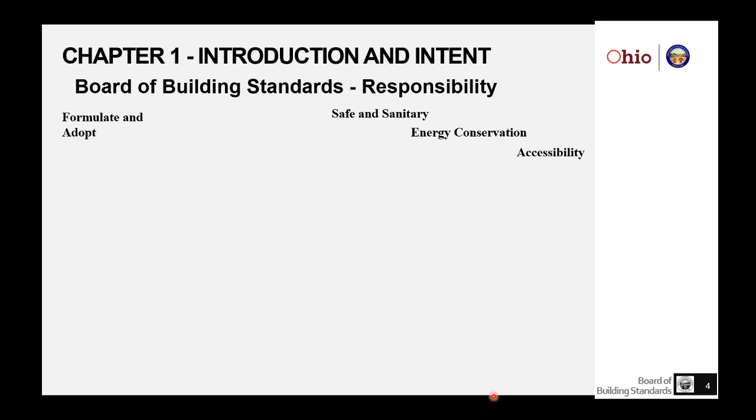So the Board of Building Standards, what is our responsibility in all this? We are to formulate and adopt building codes that provide safety and sanitation, energy conservation, accessibility. We have two families of codes that we write building codes for: the Residential Code of Ohio, which are the uniform requirements for residential buildings, and the Ohio Building Codes, which includes the building code, plumbing code, and mechanical code. These are for non-residential buildings, and these are the minimum requirements.

So that's what the board is charged with, as well as working on the process for authority to enforce certifications of building departments and personnel, and we write Chapter 1 - it's the process. As you may know, the building code is based on the International Code Council model codes, and for us, the 2017 Ohio Building Code is based on the 2015 IBC, International Building Code, less Chapter 1. So Chapter 1 is all Ohio language.

So when you look at any of the commentaries on the international website, the commentaries on Chapter 1 in the IBC are relative to the IBC - they are not pertinent to Chapter 1 of the OBC. And we have written our own commentary, which I'll be showing you in a little bit.

So to get started, we're going to do a little more introduction and talk about some keywords you should know. Chapter 1 is all about the administration of the building codes and regulation in the building process. It organizes the process, interrelates with other regulations, and establishes duties and responsibilities for everyone, providing the procedures.

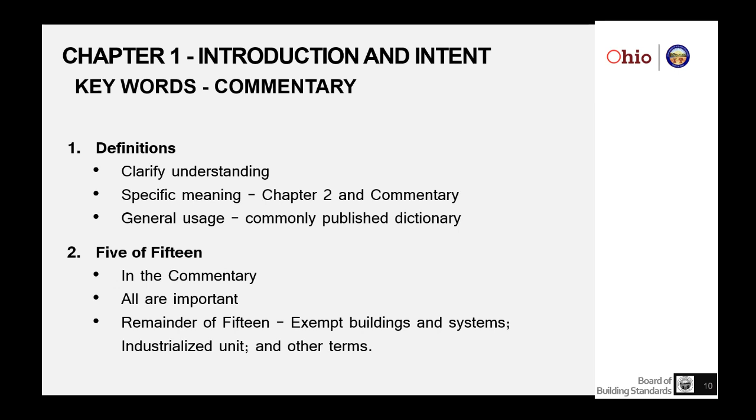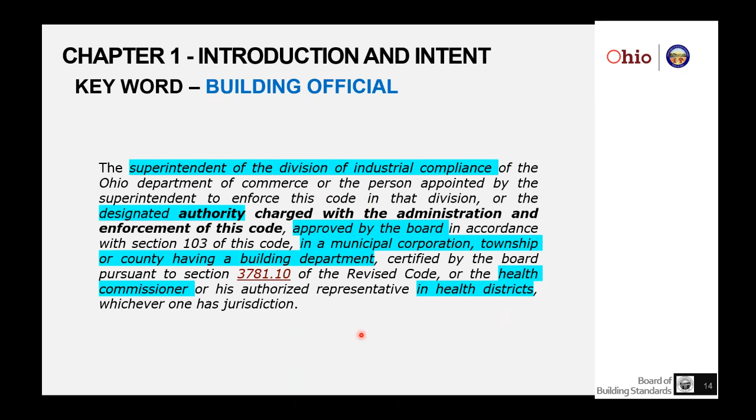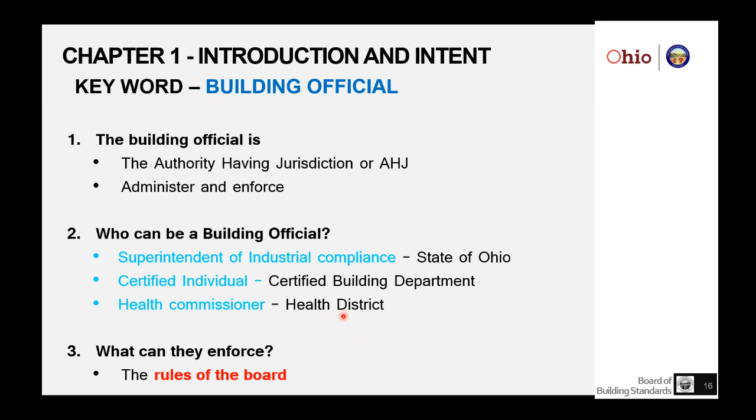So in summary, the building official is the authority having jurisdiction, and they administer and enforce the code. That's their primary duty. The 3 types of building officials that can exist are going to be a superintendent of industrial compliance, a certified individual, or the health commissioner. And what can they enforce? They can enforce the rules of the board. And that's what we're going to be addressing today.

In case you're wondering where we have the 3 different types of building officials, know that with the commercial code, the local jurisdiction is allowed to establish a certified building department. And if the local jurisdiction does establish a certified building department, one of the things they have to have is a building official to head up that certified building department. So that would be primary.

And then in the absence of a certified building department in the local jurisdiction for non-residential buildings, basically buildings regulated by the OBC, the Superintendent of Industrial Compliance for the state of Ohio is by default the building official for that jurisdiction. So no matter where in Ohio someone builds a non-residential building or a commercial building, there will be enforcement either at the local level through a certified building department or at the state level through the Bureau of Code Compliance in the Division of Industrial Compliance.

And then plumbing comes along. Some local jurisdictions enforce plumbing. If the local jurisdiction is not certified to enforce plumbing, then it falls to the health district, and it may fall to the plumbing division in the Division of Industrial Compliance if the local jurisdiction doesn't enforce health.

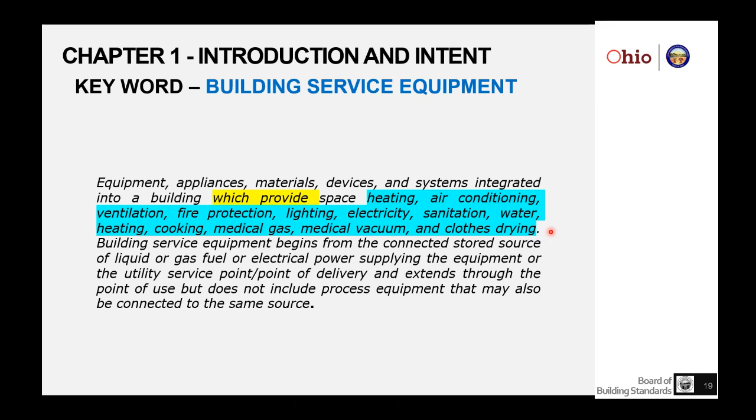And to help define this, building service equipment begins from the stored source of power and extends through the point of use. And we wanted to be really clear, because of other definitions, that it does not include process equipment. So the building code is not going to regulate the utility on the utility's side of the source, and that will be either the service point, commonly used in electrical systems, or the point of delivery, which is used in some of the fuel gas systems.

And then it extends through the point of use, wherever you consume that, and then the byproducts go off into the atmosphere—we're not controlling that end. The process equipment, we'll get into that in a bit, but basically this is something that's placed in the building and doesn't contribute to the code compliant building. It may have an effect on compliance, but it doesn't contribute to it.

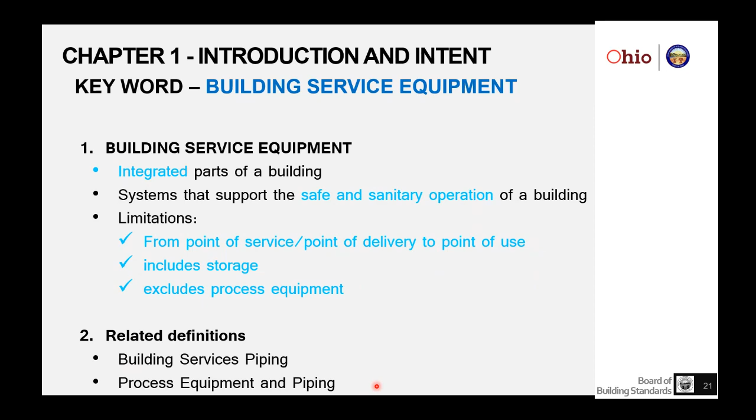So important things in summary: it is an integrated part of the building, dealing with safety and sanitary operation of the building. We talked about where it starts from, and it specifically excludes process equipment. There are related definitions in terms of building service piping and process equipment and piping in the list of definitions, which we'll touch on a little bit later.

So, fire prevention. Here is the definition as it appears. Fire prevention is about the safe conduct and operation of hazardous processes, the storage of combustibles, the conducting of fire drills, and the maintenance of fire protection, detection, and extinguishing service equipment, and good housekeeping.

One of the things you'll notice about all the things in here is these are about actions taken after a building is occupied, typically. It's about, particularly when dealing with the storage of combustibles and flammables, the inclusion of a fuel load, which could change over time as building owners move things in and out. Maintenance is an owner's responsibility, and it is not the building department's responsibility to follow, at least under the Ohio Building Code, unless the maintenance is not performed to the point where the building has developed a serious hazard—then you'd be addressing a serious hazard, and I'll go into that more later.

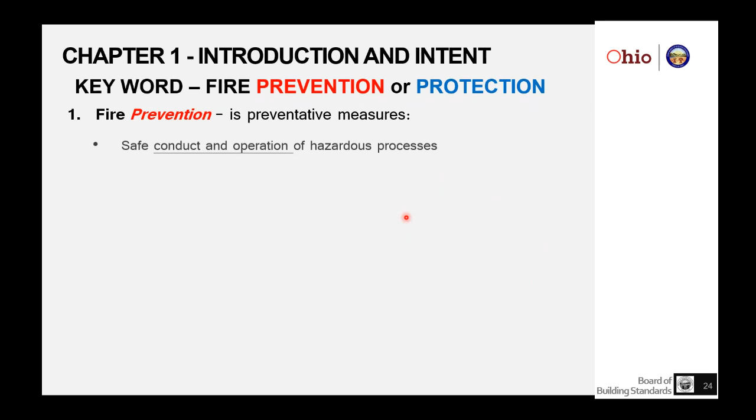So one of the things you'll notice is we talk about fire prevention. Then we also have fire protection. Is there a difference? I can definitely say without a doubt there is a difference. The reason I've highlighted these, one in red and the other in blue, is to help emphasize that difference. Fire prevention are preventative measures—things the owner is responsible to do, and we talked about them in the definition: conduct and operation, storage of combustibles, performance of drills, maintenance, and good housekeeping.

Fire protection, now these are going to be the integrated systems in the building that are incorporated as you're building it. Going back to building service, remember fire sprinkler systems were included. Under electrical systems, you can have fire alarms and those kinds of things. Those are integrated systems into the building. They need to be approved devices. They will detect a fire, activate an alarm, extinguish or control a fire, and control or manage smoke. So these are the protections.

The fire protections are regulated under the OBC. Fire preventions are actually regulated through the Ohio Fire Code by fire officials, fire prevention inspection personnel. And it's more long-term observation—as the building is occupied and over time, owners will have requirements for annual inspections by the fire prevention officer to assure that the operation of the building and the service equipment related to fire protection maintain the same level of safety as originally approved.

So things like the storage of combustibles and hazardous materials—if an owner changes that and the building's not approved for the new materials, the fire official, through long-term observation, is supposed to catch that, may write the building owner up, and for the owner to correct it, they either have to get rid of that combustible they're storing, or they may have to submit to the building department to get an approval and make whatever changes are necessary to the building.

It is addressed in Ohio law. I mentioned before that it's the use and enforcement of the Ohio Fire Code—that's fire prevention, done by local fire prevention inspectors. Fire protection is done through the building code approval process through construction.

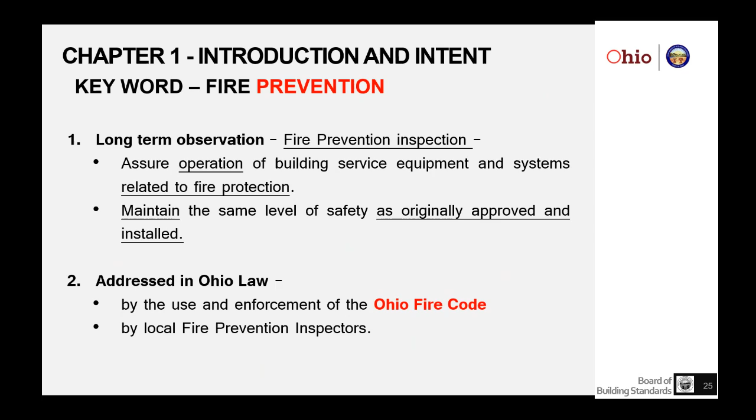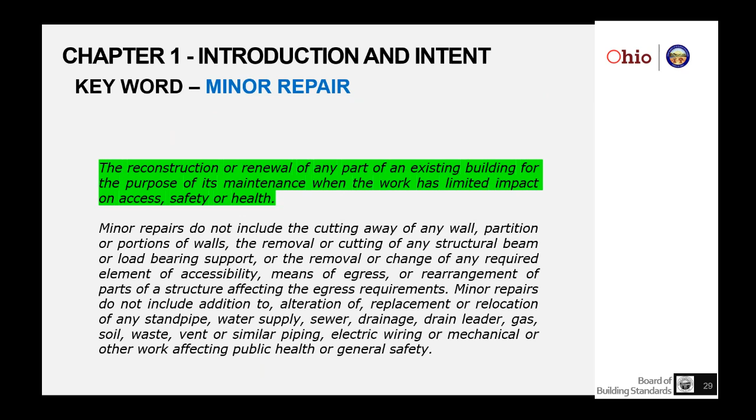What minor repair is not: it does not include any of the things listed here. It does not include the addition to, alteration, replacement, or relocation of any of these building service equipment pieces.

So this is the structural part of the building. This is the building service part of the building. If the owner is proposing any of this type of work, it is not minor repair. It may still be repair, it's just not minor. I'll talk about why that's important here in a minute.

So it is work to construct or renew for the purposes of maintenance, and it is limited. It's minor in impact on access, safety, and health. The repair must comply with the existing or previous approvals, because that's essentially what they have been approved for, and they can do it. They are responsible to maintain in accordance with their existing approval.

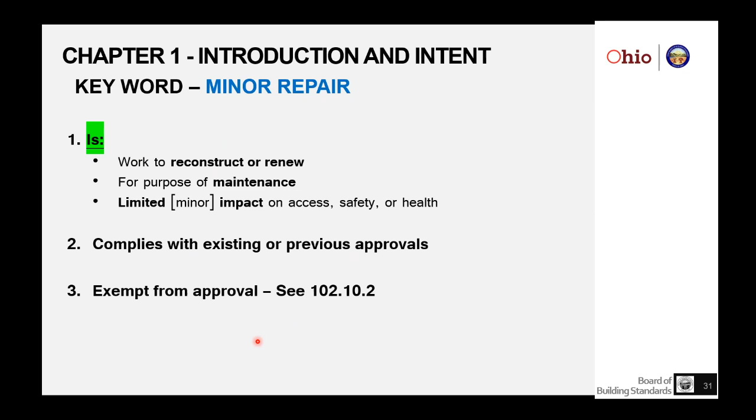Why it's important is that in section 102.10.2, minor repair is exempt from approval. They still have to comply with the existing approvals, but it is exempt from approval through the local building department.

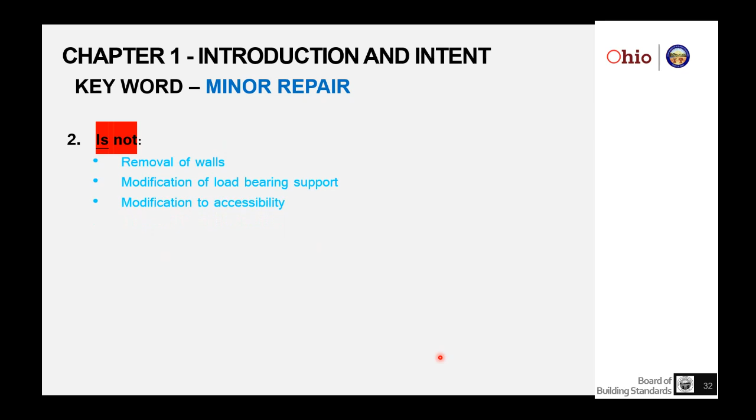What it is not, again, I've just listed out the stuff that was in that definition. I may use some slightly different terms to help understand. For example, building service piping, electrical wiring, building service equipment. If they start doing any of these things, in the removal of walls, it's typically going to deal with the load-bearing walls and load-bearing support conditions.

Next important definition to really get your arms around as a building official is a serious hazard. First and foremost, it is a hazard. It's not necessarily something that's non-compliant or something that's old or something that's unmaintained. It does have to rise to the level of a hazard, and specifically it rises to a hazard of considerable consequence to safety or health.

It goes even further than that, that this hazard has been established through experience to be of certain or probable consequence. Very important. It's considerable, it's certain or probable. Or let's say you don't have any experience with the hazard, it can be determined or is obviously such a hazard that you may not have ever seen before, but if you can determine or it looks obvious that it will be certain or probable to have considerable consequence to safety or health, it rises to the level of a serious hazard.

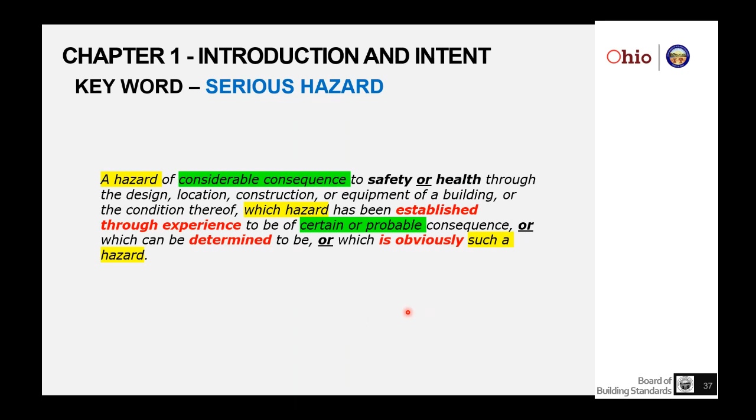So we'll just summarize it a little bit more. It is considerable. It is established through experience, can be determined or is obvious. All that is determined by the building official and only the building official.

If an inspector out in the field sees something they think is a serious hazard, they should be picking up their phone, contacting the building official, describing it to get some idea from the building official whether it is a serious hazard, and then take appropriate action. Action is required by the building official and must be taken if it's determined to be a serious hazard. Remember, considerable consequence that is certain or probable to the safety or health of the occupants in the building.

It is not founded in conjecture or preference. It is not based on possible consequences. If you think that something might happen someday, that is probably in the possible. If you think that not having a cover plate on an electrical outlet is a serious hazard, that may be a preference. Depending on some of the other conditions of the building, it may not rise to the level of a serious hazard. I'm sure we've all seen electrical boxes that don't have cover plates on them, and they don't all start a fire, or occupants don't get electrocuted just because that plate isn't on there.

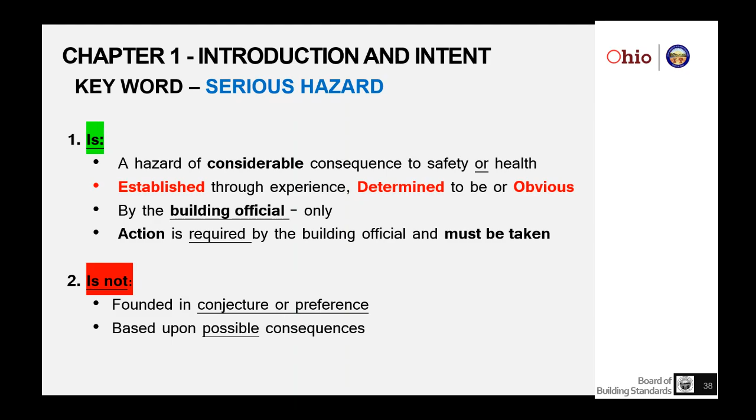So moving on, we're kind of done with that intro and definitions.

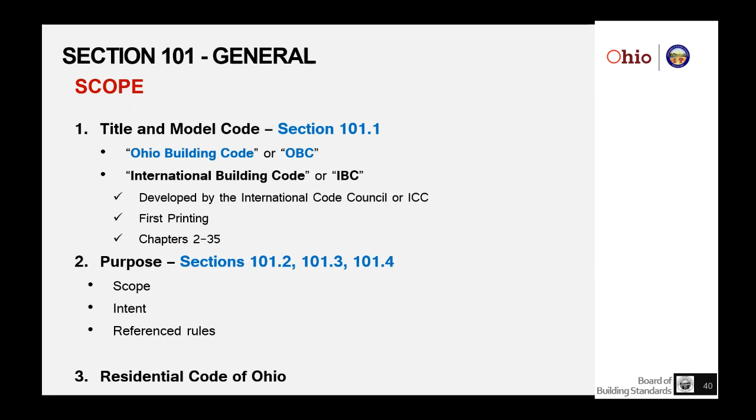So the scope, 101.2—what does, in the broadest sense, the Ohio Building Code cover? This is the charging paragraph as written, and notice at the bottom there are exceptions to the scope.

Breaking this down into some lists, we're going to talk about what types of buildings are within the scope, a little bit about dwellings, accessory structures, and the land on which the building is located. It applies to the construction, alteration, movement, enlargement, replacement, repair, equipment use, occupancy, location, maintenance, removal, and demolition of every building or structure, or any appurtenance connected or attached to such buildings or structures. So there's not a whole lot that's not in this list when it comes to addressing a building and the construction-related activities an owner can perform.

Cleaning is not there.

One final note here: this code does apply to detached 1, 2, and 3 family dwellings only to the extent indicated in Section 310 of this code. This is primarily just a reminder that there may be some 1, 2, or 3 family dwellings that look like dwellings regulated under the residential code, but because they have a business, commercial, or other non-residential occupancy in them, it will be picked up in Chapter 3 under classifications, more specifically Section 310. It allows some back and forth there.

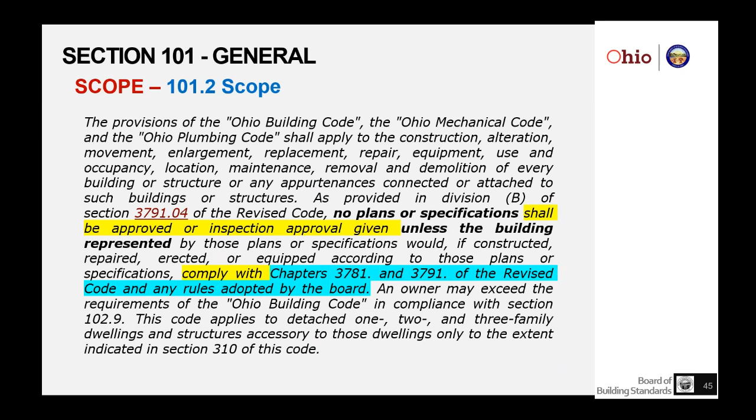This is basically bringing forward law in Section 3791.04 that no plans or specifications shall be approved, or inspection approval given, unless the building represented by the plans and specifications will comply with Chapters 3781 and 3791 of the Revised Code and any rules adopted by the board. So Ohio 3781, 3791 gives the board the authority to adopt rules, and the Ohio Building Code is one set of those rules adopted by the board. So is the Ohio Plumbing Code, so is the Ohio Mechanical Code, so is the Residential Code of Ohio. So it's the authority to enforce.

Types of buildings that are within the scope—we kind of went through that already. Any of these construction activities: if you change the occupancy of a building, if you make it bigger, you change its location. As for maintenance, the building code doesn't require that you enforce maintenance, but some of the maintenance activities that an owner is doing may require them to make application for approval to the building department. That's why this is in the list.

Replacements, removals—roof replacement is probably one of the biggest ones. It's a system that wears out, it needs to get replaced. That could be looked at as maintaining it in accordance with its original approval, but it does need approval by the building department if they are replacing their roof. If it's just a minor repair to their roof, they don't need approval, but if they're doing anything but minor repair, they need approval.

Demolition, things connected or attached to the building, equipment systems, and that kind of stuff. Dwellings and accessory structures—you need to check 310 to see if they are regulated under this code, or possibly over as a 1, 2, or 3 family dwelling.

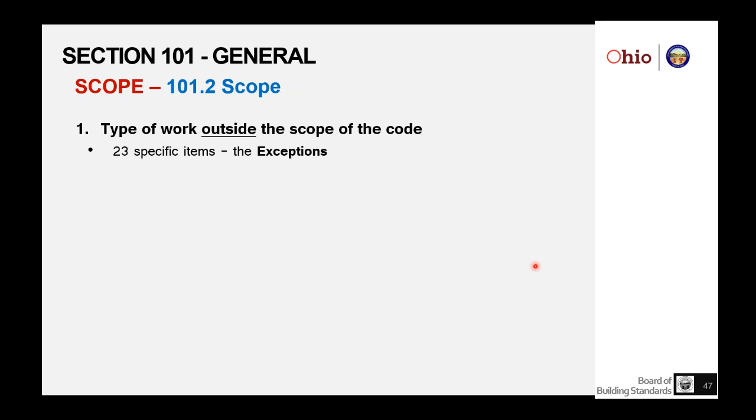Types of work that's outside the scope of the code. Remember, there are exceptions down at the bottom of 101.2—23 specific items listed under those exceptions. They are typically going to be structures regulated by other entities, like the federal government or the manufactured housing program or the Residential Code of Ohio, for other specific purposes like power generation or gas and oil processing.

There are some specific things that are identified as not a building or part thereof. The best example I can think of is a retaining wall out in the landscape, not associated with a building to protect its foundation. That would be

not regulated. Land use—already talked about that a little bit in the previous slide. The building code doesn't deal with deciding insurance claims and the contracts therein about what's paid for, what's not paid for. We don't regulate property sales or ownership. We do not regulate any kind of contracts, contractors, who does the work, or the level of craftsmanship required by the owner. Our focus is on a minimum level of safety, sanitation, energy conservation, and accessibility.

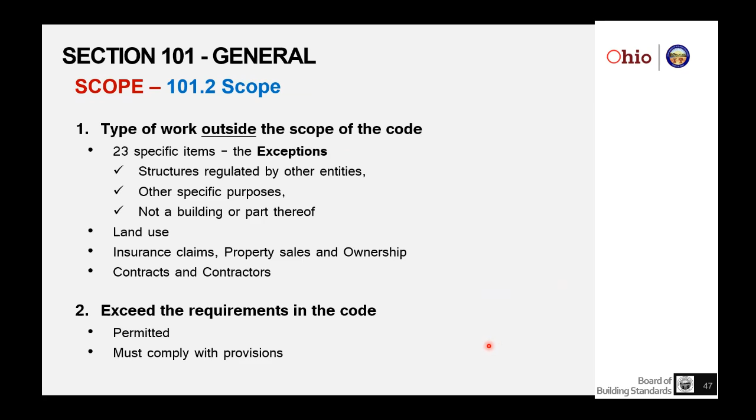Moving on to the intent. This is basically the purpose of the code, and it is, again, the uniform minimum requirements, and it relates to conservation of energy, safety, and sanitation of the buildings. And I toss in there accessibility—we do have Chapter 11, which deals with accessibility.

Remembering that is compliance with a standard, and that the Americans with Disabilities Act, or ADA, is federal law and is enforced at the federal level and is a civil action. The owner has to respond to that independently of the building code. Typically, it has been that if they comply with Chapter 11 in the Ohio Building Code, they would also then have met the Americans with Disabilities Act. All that stuff is continually moving, but I believe it is still true today.

Now, and this is all with consideration for performance, extent of use, and standardization of the building code. The performance is, in the Ohio Building Code, we're going to set performance objectives. It allows a great deal of flexibility on the side of the owner and their designer to meet those performance objectives.

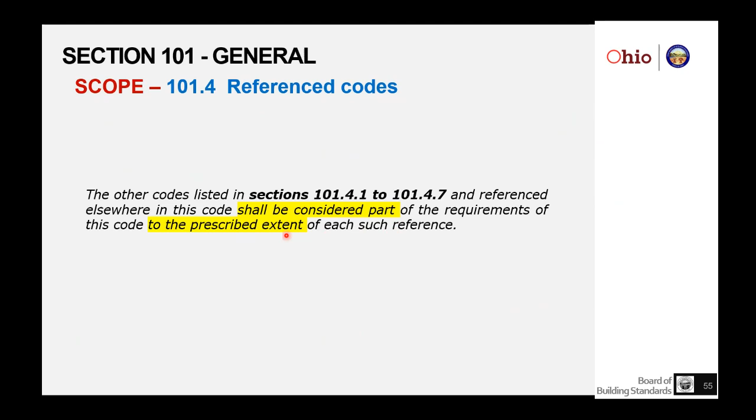Section 101.4 talks about reference standards. This is where we start bringing in some other reference codes, and they will be considered part of the requirements to the prescribed extent. The codes referenced in the OBC include the other BBS rules, which are the mechanical code, the plumbing code, the boiler and pressure vessel code, and the elevator code, and these are where they are located in the Ohio Administrative Code. Then the Ohio Fire Code is referenced through the OBC—this is the Fire Prevention Code, and this is where it's located in the Administrative Code.

Remember, it's to the extent. So from within the Ohio Building Code, you're going to have references to the Fire Code, and it's going to tell you the extent to which the Fire Code can be enforced from the building official's approval.

Also, one of the things we've included in the commentary relative to this is a laundry list of issues and questions relative to elevators—new passenger elevators, freight elevators, and LULA elevators in non-residential buildings—talking about some of the common violations that they see.

This is provided by Chip, the director of elevator inspections for the state, and he has made presentations to various groups and is happy to talk with any building officials who have questions about elevators. Chip's group has certain responsibilities to deal with the elevator itself and its operation, because they have to inspect and license them. But there are things the building department needs to look at relative to that elevator shaft, the structure the elevator is in, and the systems that support it. If there's any question, you're more than welcome to contact him regarding elevators and inspections.

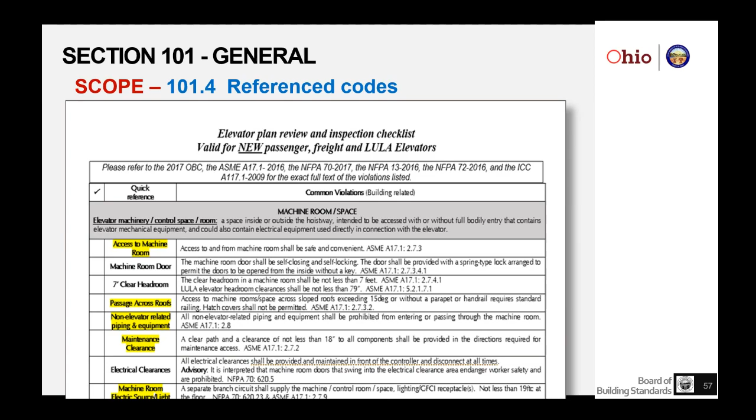We're going to talk about perhaps other agencies that may be involved by virtue of the operation the owner wants to conduct being a licensed operation, like childcare or an establishment that serves alcohol or something similar. So they have some licensing requirements. The fire official may also have some responsibilities after the building is occupied, and the licensing group may have some responsibility after the building is occupied. These are typically the annual kinds of things, the renewal kinds of things.

And then the building official—if there's a triggering event like a serious hazard, the building official gets back involved in the process, and in all of these cases it may send the process back through to get approvals to correct some of these things.

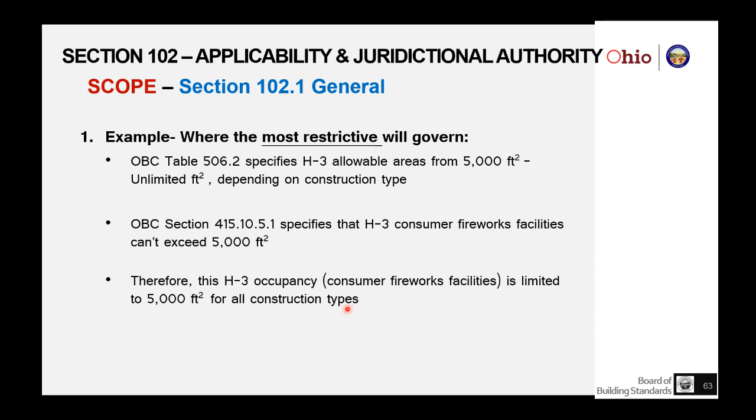Another example of most restrictive: Table 307.1. Again, we're dealing with hazardous materials here. It permits up to 150 pounds of liquefied flammable gas per control area before the building is considered a Group H occupancy. So the occupancy could stay at whatever the main occupancy of the building is, because the amount of hazardous material is below 150 pounds. Remember that the code will also send you to section 414 at 307.1.2, and to the Ohio Fire Code anytime you have hazardous materials, whether above or below this number.

And you'll see that 414.2.2 reduces the quantity per control area and the number of control areas based on the story above or below grade plane of the hazard. So if this 150 pounds is a story above, or 2 stories above grade plane, that number is going to get reduced, as well as the number of control areas that can exist on that floor.

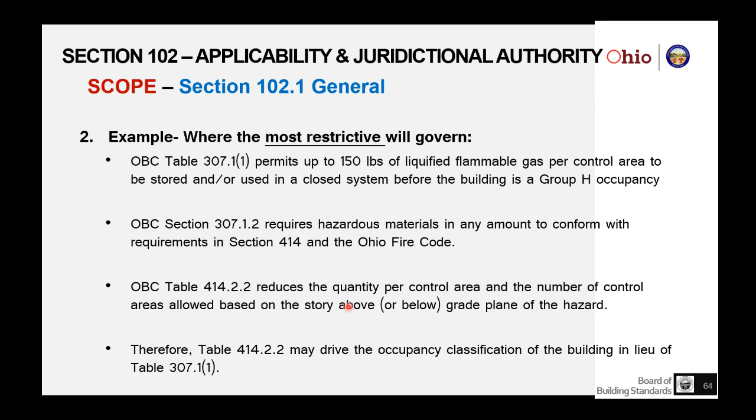As a result, if they exceed that modified, reduced number, 414.2.2 may drive the occupancy classification of the building in lieu of 307.1, because they would have exceeded the allowable quantity of hazardous material. Therefore, it makes it a Group H occupancy, and then they would have to comply with section 415 as well.

Now an example of a specific requirement. Section 304 classifies an ambulatory care facility as a Group B occupancy. 903.2 does not require, in general, automatic fire sprinkler systems in Group Bs. But 903.2.2 requires automatic fire sprinkler systems throughout the entire floor containing an ambulatory care facility, and throughout all intervening floors where the care facility is not on the level of exit discharge. So as a result of 903.2.2, this Group B occupancy with an ambulatory care facility will be required to have an automatic sprinkler system. It is specific to a specific condition.

I will point out that one of 2 conditions have to exist regarding the ambulatory care facility, in addition to the fact that it is an ambulatory care facility, and I didn't bother to list those. But typically, it's because Group B doesn't in general require sprinklers. If you see an ambulatory care facility, you want to make sure you look at these 2 specific requirements to see if sprinklers are actually required.

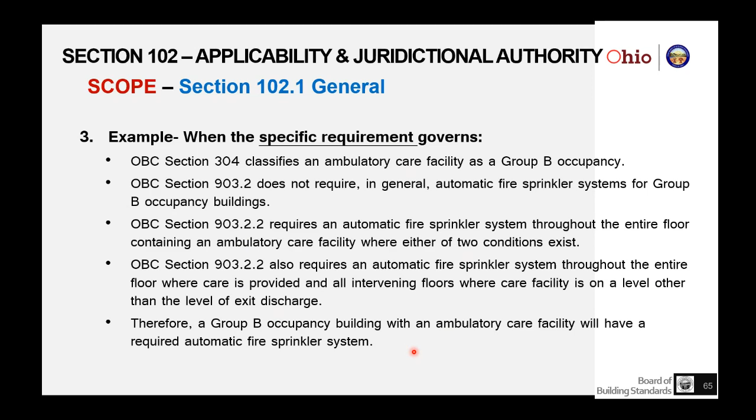Municipal corporations do have the ability to make further and additional regulations relative to the building, provided they are not in conflict with 3781, 3791, or the rules of the Board of Building Standards. So they can add some or make modifications, but they can't be in conflict with the rules of the board.

Section 102.3 talks about other rules. 102.2 is other laws. This is other rules.

Important to note here that the rules of the board shall supersede and govern over other rules. It also points out that owners may be required to meet other requirements as set forth by their licensing agencies, such as the fire marshal's office, Department of Health, Job and Family Services, and mental health and addiction services. There's a number of them. It reminds the owner and designers that they should investigate for any additional licensing agency requirements and make sure they're incorporated into the plans being approved, if that stuff needs approval. So it would be a requirement for licensing, not necessarily a requirement from the building code.

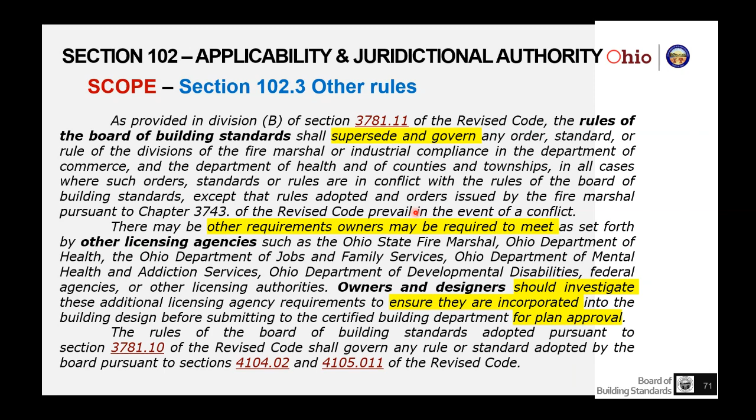So the rules of the board supersede and govern other orders, standards, or rules from the listed group of agencies, and I've just grabbed a sample here, but that's in that paragraph. There is one exception in that paragraph: under revised code 3743 fireworks, the state fire marshal does write rules for fireworks, and their rules take precedent over the board's rules regarding 3743 and fireworks.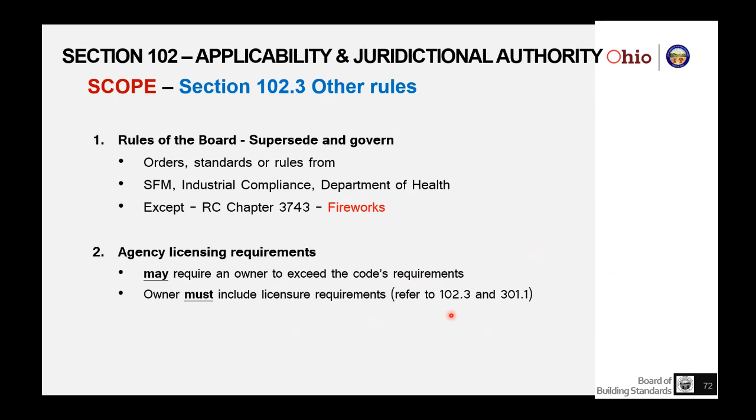So again, this is a reminder to the owner that the agency for licensing purposes may require the owner to exceed the code's requirements. The owner must include any of those licensing requirements in their application, especially if those conditions require approval. Even though they exceed the code's requirements, they may still require approval to be completed.

102.5 deals with referenced codes and standards. So we have laws, we have other agency rules, and now we have things that are referenced from within the Ohio Building Code that

are part of the Ohio Building Code by reference. So if reference is made out of any one of the rules of the board to any federal provision, any industry consensus standard, or a technical publication, you want to go back and look at Chapter 35 of the Building Code for the specific date and title of that publication and the name and address of the promulgating agency, to see what is the valid referenced provision, standard, or publication being used, and the work must comply with that reference. Know that the building code is Chapter 35. The mechanical code is the same thing in Chapter 15 of the mechanical code, and the plumbing code is Chapter 15 of those codes.

Reminder that it's considered part of this code, meaning the Ohio Building Code, to the prescribed extent. Most notably here would be something like NFPA 70, the National Electric Code. It is a referenced standard. It is listed in Chapter 35 of the Ohio Building Code, and it is considered part of this code to the prescribed extent. There's a lot of things in the National Electric Code that regulate scopes of work that are outside the scope of work of the Ohio Building Code. So first, the work has to be regulated under the Ohio Building Code. Then, to the extent of that, the reference standard is applied.

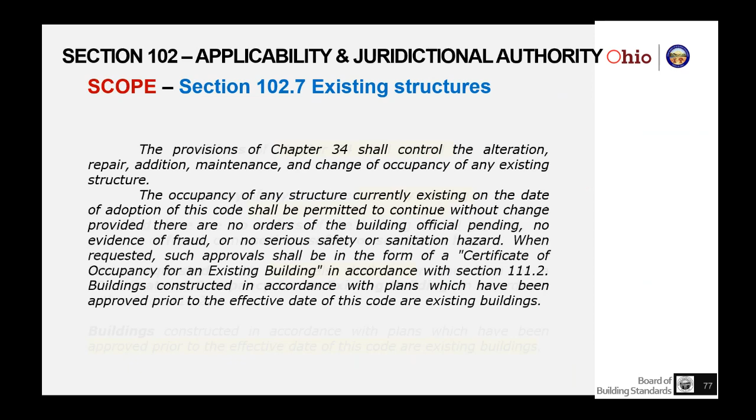Most notably, the first sentence here is that the provisions of Chapter 34 shall control the alteration, repair, addition, maintenance, and change of occupancy of any existing structure. So before you apply any of the other technical provisions in Chapters 2 through 33 of the Ohio Building Code, you need to go out to Chapter 34 and see, based on the scope of work proposed, what requirements for new construction are required to be complied with.

The next piece of this is that the occupancy of any structure currently existing on the date of adoption of this code shall be permitted to continue without change, provided there's no orders from the building official present, no evidence of fraud, and no serious safety or sanitation hazard. So regardless of whether the building complies with the current code, or complied with the code that was in force at the time, it got built without an approval.

If it existed on the date of adoption of this code, so November 1, 2017 in this case, it will be permitted to continue without change. So the owner doesn't have to do anything, provided the building official hasn't issued an order that's still pending and they haven't addressed it.

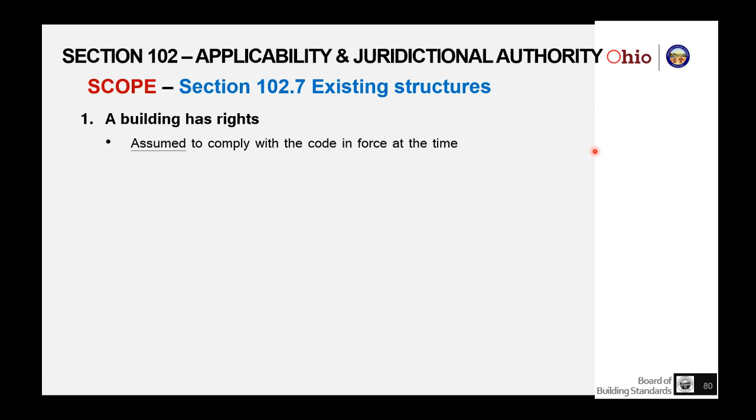And all this goes to a long list of arguments that have been made that basically buildings do have rights. One is that they are assumed to have complied with the code in force at the time, provided, again, there are no orders of the building official pending, no evidence of fraud, and no serious safety or sanitation hazard. So if none of those things exist, that building is assumed to have complied with the code in force at the time, whether it has that certificate of occupancy or plan approval.

Control for enforcement for existing buildings starts in Chapter 34. So anytime you get work on an existing building, you need to jump out and start in Chapter 34 to find out what provisions for new construction, those provisions in the technical sections, Chapters 2 through 33, are applicable to the proposed work in the existing structure.

An existing building either has a certificate of occupancy or a plan approval per 102.7, or can get a certificate of occupancy for an existing building. These are sort of those conditions.

Again, the certificate of occupancy may be issued to an existing building, and this is some of the language from 111.2. It has to be requested by the owner. The building department has the responsibility to investigate and inspect the building, and there has to be evidence that the use as requested exists. So it has to be being used as they are requesting the certificate of occupancy for.

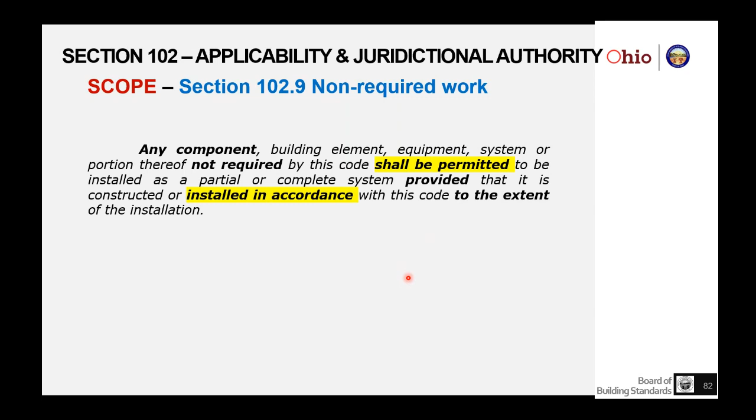Another important thing is section 102.10, work exempt from approval. This is different than the exceptions under 101.2, which is the scope covered by the building code. Work exempt from approval is broken down by category. It's not required to get approval; however, all the work still must comply with the applicable provisions and rules of the board. It's broken down into building, electrical, gas, mechanical, and plumbing, with 11, 6, 4, 7, and 3 described items under each of those categories.

So when you look at that, if they're doing just this work, they don't have to get approval. However, they still have to comply with the rules of the board. The most notable ones are in the electrical system. One example is low voltage systems less than 50 volts, which don't require approval. However, if they're running wires in a plenum, those wires have to be plenum rated because that's a requirement in the building code. They don't have to get approval, but they do have to install plenum rated wire. If they penetrate a fire rated partition, they have to seal that penetration in accordance with the rules for that fire rated partition. They don't have to get approval, but they do have to install it that way.

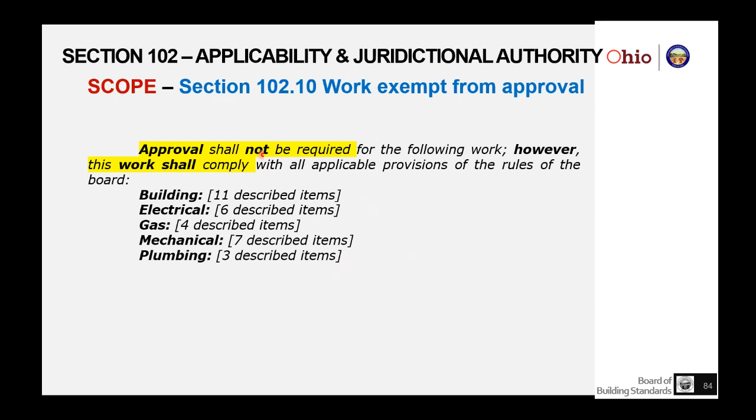Emergency repairs, 102.10.1: sometimes repairs have to happen because they're time sensitive or weather sensitive. An owner is allowed to do that. If that repair work required approval, they need to follow up with the building department and get an application for that work in within 24 hours of the repairs being done.

Also, 102.10.2, minor repairs. This goes back to that definition and why it's important for a minor repair — it is exempt from approval. So if an owner had a half a dozen shingles blow off their roof, they can replace those half a dozen shingles as a minor repair and not have to get approval for that work.

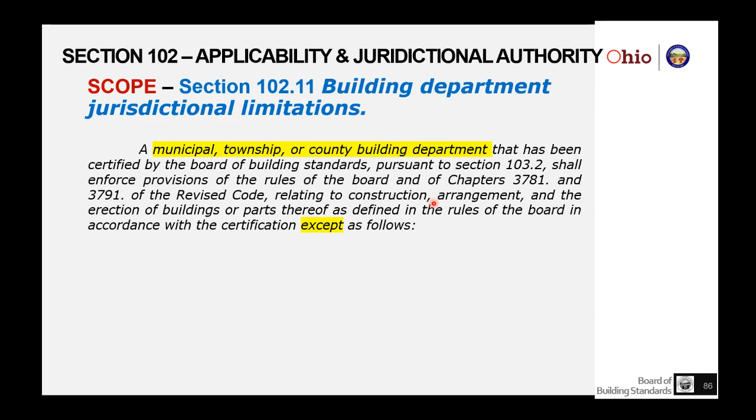102.11, building department jurisdictional limitations. You have limits about how far your authority goes. This is described here in 102.11, and it identifies that basically you shall enforce the rules of the board related to construction, arrangement, and erection of the building, except when it comes to fire, relating to fire protection. We kind of talked about that in definitions.

Health, relating to sanitary conditions. Sewer and drainage systems, basically dealing with building sewers and all laterals. Know that sewers are different from drains, and understand that difference. Power generation is outside the scope — it's typically going to be with the utility company.

Now, one thing about power generation that the building department should be aware of is that the utility doing the power generation may request that the building department review and inspect any work on their project, but that is at the request of the utility. The utility is not required to submit plans for the power generation, transmission, and distribution structures. Then there are state projects.

So again, remember, this is municipal, township, and county building departments. If the construction is on land owned by the state, or a building owned by the state of Ohio, it automatically goes to the superintendent of the Division of Industrial Compliance.

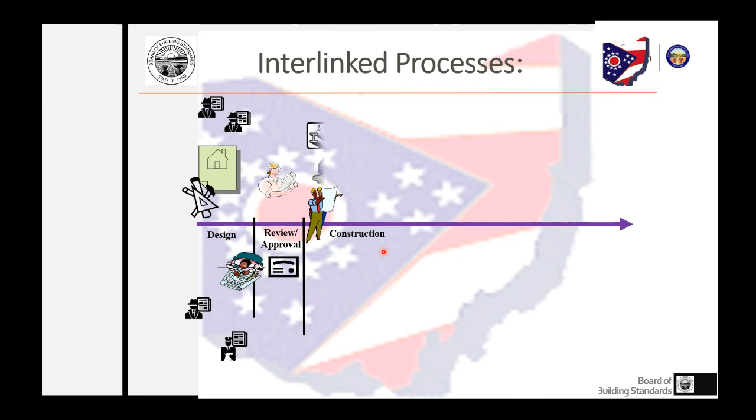Here's our interlink process diagrammed as we build the picture, summarizing all this. An owner has a plan, they want to build a building. They have a design phase. They need to check with building codes, fire codes, local ordinances, and any licensing agencies they may have to comply with. They prepare their plans and submit them to the building department for review and approval. They cannot start any work without that review and approval, which comes in the form of a certificate of plan approval. That certificate allows the owner to start construction. They get their contractors and start building.

As they're building, owners are required to contact the building department and have the inspector come out to inspect the work. There are certain required inspections. If they complete all of those inspections satisfactorily, they will get a certificate of completion, a certificate of occupancy. They cannot use or occupy their building until that certificate is issued. That allows the owner to occupy their building. One of the conditions of occupancy is that they must maintain the building in accordance with its approval. So the building code covers this building approval process: application of plan approval, certificate of plan approval, inspections, certificate of occupancy.

That's the OBC. The OBC does allow for owners to do some preliminary work with the building department in terms of clearing up ideas, getting a preliminary plan review before the full one is made. Once that certificate of occupancy is issued, that's when the fire prevention process takes over and the fire code applies.

In certain jurisdictions, the fire chief may want to weigh in on the building approval process, particularly in the review of plans, and they have the right to do that. We encourage building departments to coordinate that effort with the fire official. Now, the fire official does not control this process. They must complete their review and provide their information within the time frame of the building approval process.

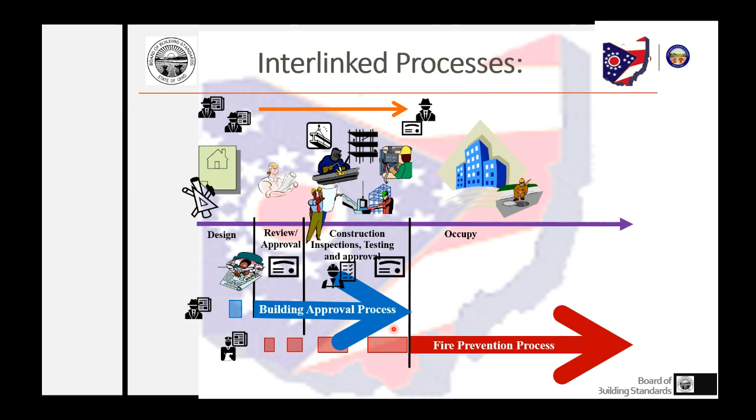These various local agencies or licensing agencies may inspect and issue some type of certificate or license to the owner to conduct the operation they want to conduct, and that's separate from the building code process - we don't have much involvement there. Although what this license may do is require the owner to do something that is in this process.

The owner may then want to alter, add, or change something about their building. If that work is minor repair, it may not require any approvals, but if it's other than minor repair, they're going to have to do some kind of submission back to the building department. If they want to make an addition, they'll have to submit back to the building department. The fire official may go out there in his annual inspections and find a problem. The owner may be able to fix it through minor repair or maintenance, or they may be required, because of the fire official's order, to come back to the building department to get approval for that maintenance work.

Again, a serious hazard would trigger the building official to come out, and the building official's order is likely going to require the owner to come back to the building department for approval. Also, the licensing agency may have annual inspections and may issue an order through the licensing that requires the owner to come back to the building department for approval to clear up whatever issue that is. That's how the process is interlinked and how it works.

So that whole approval process - approvals are required. 3791.04 is where you find the requirement, and it ties back to needing approvals for buildings that are affected as described in 3781.06 and the rules of the board authorized through 3781.10. This is the legal framework. It is assuring public health and safety. These are the minimum requirements.

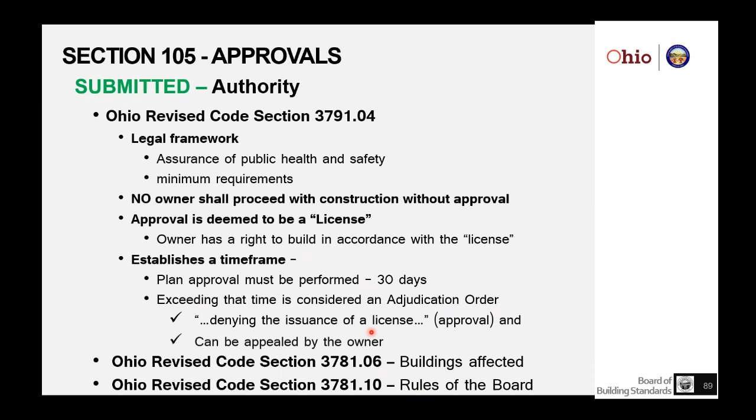Because if they exceed that time, it is considered an adjudication order and the owner has the right to appeal any order that's issued. This particular order would be the denying of the issuance of a license, or in other words, an approval, and it can be appealed. So approvals are required. 105.1 can't state it any more plainly.

There are actually two approvals in any building process. There is the approval to start, so the certificate of plan approval, and there is the approval to occupy, or the completion of the construction process and the permission for the owner to occupy their building. In this case, if an owner intends to do any of those activities for a building, they must first make application to the building official and obtain the required approval.

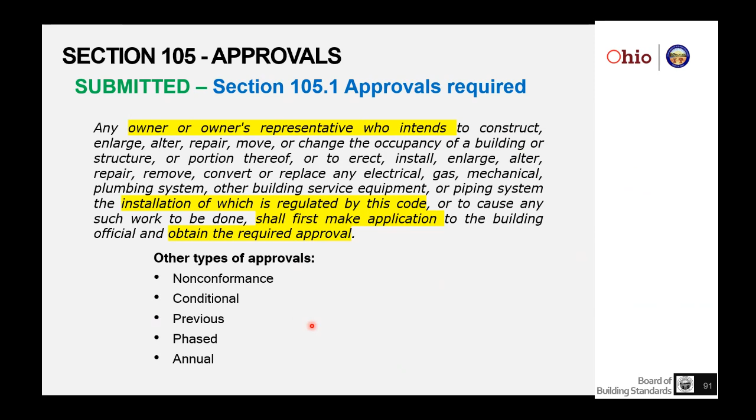In the building code, this is considered the full approval. We don't actually have a word for it, we just call it the approval. If they get an approval, they are allowed to construct. That's their license. They are allowed to construct what is approved. There are other types of approvals, and we'll talk about them briefly. There's a non-conformance, a conditional, previous, phased, and annual approvals.

So the non-conformance approval is issued when the documents that are submitted with that application do not conform with the requirements of the code. The building official actually can issue an approval provided that whatever is non-conforming is not going to be considered a serious hazard, and the owner has the responsibility to submit revised construction documents within 30 days. If they don't submit those documents within 30 days, the building official issues an adjudication order revoking the plan approval.

So what this does is it gives the owner an opportunity under the same application to get a non-conformance approval, provided it's not a serious hazard, but it does require the owner to resubmit revised construction documents showing compliance. And if they fail to do so in 30 days, that plan approval is revoked. This is a timing thing, and I don't know how often it's actually used.

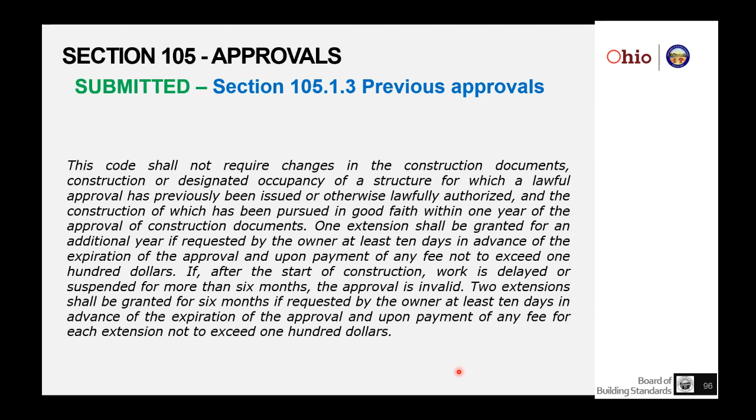Important to know that a conditional approval is not a phased approval, because previous approvals, I believe, are fairly self-explanatory. It's any previous approval, and that will apply to existing buildings, obviously, and it's important to know what they are, so to know what that building has been approved, lawfully approved for use as.

Phased approvals, this one's probably the most used of the other kinds of approvals outside of a full approval. And basically it's issuing an approval for any portion of a building before all of the construction documents have been submitted to the building department.

If the work that is submitted is compliant with applicable requirements of this code, the building official can issue a phased approval for that work. It goes on to say that the holder of that partial approval knows that they are proceeding at their own risk and without assurance that the approval for the entire structure will be granted.

That's because information is not known, construction documents haven't been submitted. When those documents get submitted, it may impact the previous work that was approved because of what's being proposed in that new location. Remember, the ambulatory care facility, if it's on a level other than an exit discharge, they got a phased approval for a foundation in a Group B building, and they're building up.

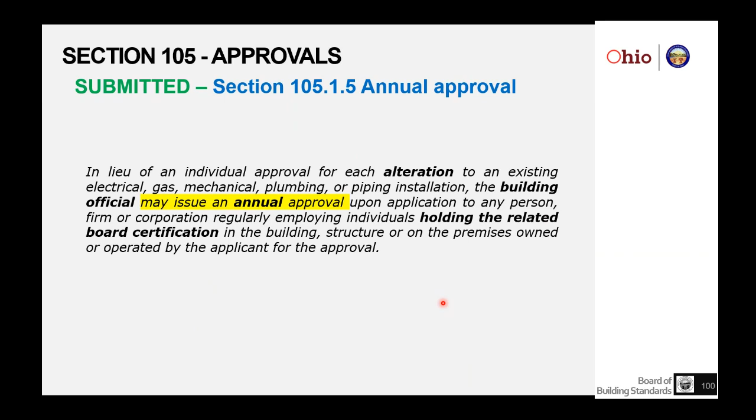There are some conditions about issuing the annual approval. The owner has to keep records that the building owner has to employ individuals that hold the related board certifications regarding the work that's being done. So if they're doing electrical work, an employee who is responsible for the work being done at that company has to be an ESI or hold an ESI. If they're doing plumbing work, they have to be a certified plumbing inspector, so they have to hold the related board certification for the work that's being done.

The records that are kept need to be accessible to the board or to the building department. The building department should make regular audits of that work, of those records, and they must also include in those records the applicable construction documents for that work.

Approvals have validity. They can be invalid. And again, this is reinforcing the fact that in the absence of fraud or serious hazard, any structure built in accordance with approved plans shall be conclusively presumed to comply with the rules of the board. So that again goes back to support those conditions that can invalidate an approval. It is considered to comply.

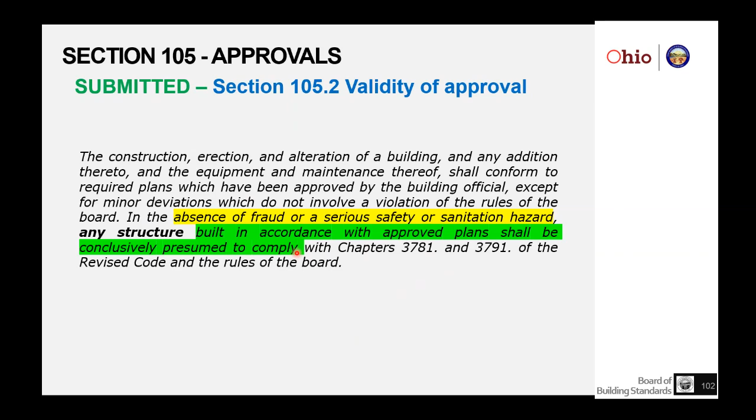An approval has an expiration date. It also can be extended. Know that an approval is invalid if they don't start work within 12 months of the approval. They can ask for one extension for that expiration. On the extension, if for whatever reason work is delayed for more than 6 months, the approval is invalid. In this case, 2 extensions can be granted for 6 months each once work has started. So work has to start within 12 months. Once work starts, it can be suspended for 6 months, but no longer. You can get 1 extension for a year on the expiration, and you get 2 6-month extensions once work has begun. Otherwise, the approvals are invalid and the owner has to start that process over again.

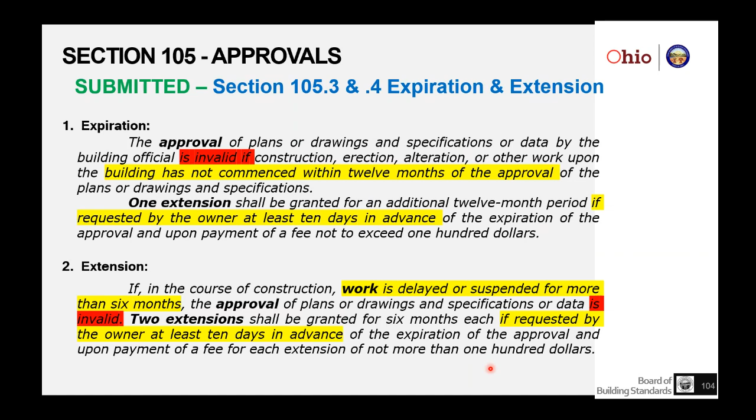So, certificate of plan approval. This is what the building official is required to provide to the owner if the work that's being proposed is compliant. It has certain requirements of what needs to be on the certificate of plan approval, and the board has provided an example of a certificate of plan approval with that information contained. You can find that information on the Board of Building Standards website under the Resources tab, and it will be in the Building Department resource packet.

So construction documents. The first thing here is this is basically telling the owner what the owner needs to provide for whatever proposed work they are doing. It is meant as kind of a laundry list, a checklist to communicate to the owner what they need to communicate to the building official and his plans examiner to demonstrate compliance.

Sections, and that would be in 106.1.1. So these construction documents are submitted for review - that's what 105 is saying. They are reviewed in compliance with the OBC - that's what 107 is saying. And then the building official shall issue a certificate of plan approval per section 105.2.

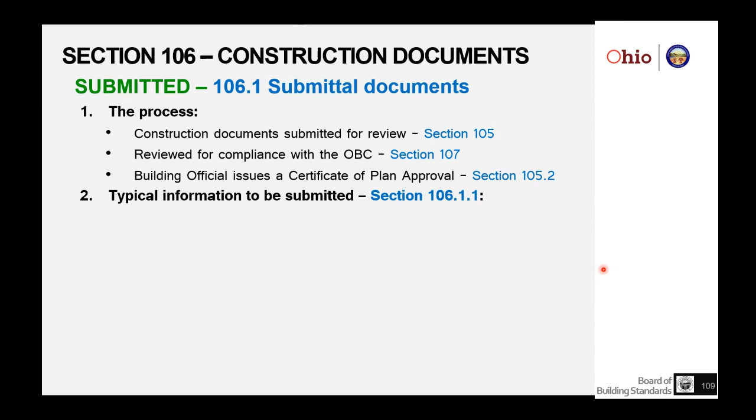Typical information that has to be submitted - there's several sections. These are the headings for each of those sections. It starts from an organization piece, goes to the more general, from the more general information to the more specific information, moves on to the various systems, and then any other additional information that's pertinent to the proposed work.

One of the things that is noted in 106.1.1.1 is fire protection systems. Oftentimes an owner doesn't know what the fire protection system is going to be at the time of getting approval. If that is the case, the building official is directed in this section to issue a conditional approval for that fire protection system.

So special inspections - the other thing that is required in the list provided by the owner or their design professional is the list of special inspections. So that's going to tie to Chapter 17 of the OBC. There's going to be potentially some special inspections that are required. That list has to be provided in the set of construction documents.

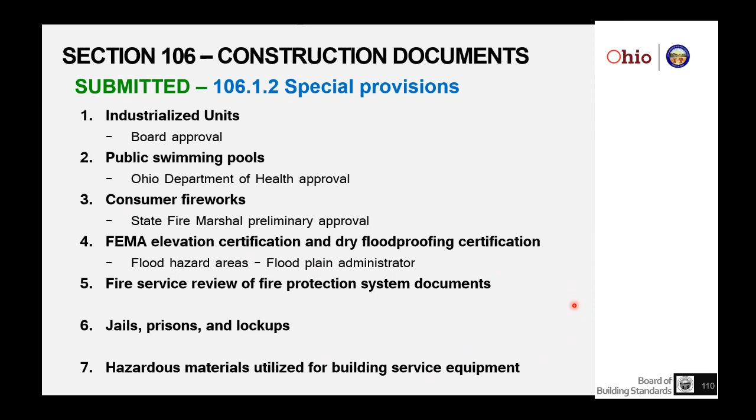There are 7 groups of special provisions. Specifically, industrialized units are going to need board approval. Public swimming pools are going to need Ohio Department of Health approval, and this is going to be in addition to whatever requirements these things need from the building department out of the Ohio Building Code. Consumer fireworks are going to need state fire marshal preliminary approval. The FEMA elevation for floodplain work is going to have to be provided by the floodplain administrator.

Fire protection system documents - basically this ties back to jurisdictions where the fire official wants to participate in plan review. The building official needs to coordinate that effort with the fire official. For jails, prisons, and lockups, the Ohio Department of Rehabilitation and Corrections has to provide a preliminary approval.

And hazardous materials - there are 2 paths here. One is if the hazardous materials are associated with building services, or if the hazardous materials are not associated with building services. So these are things to be aware of as a building department, that the owner is going to have to get approvals from some of these other agencies that should be provided to you in the set of construction documents so that you can do your work and review properly.

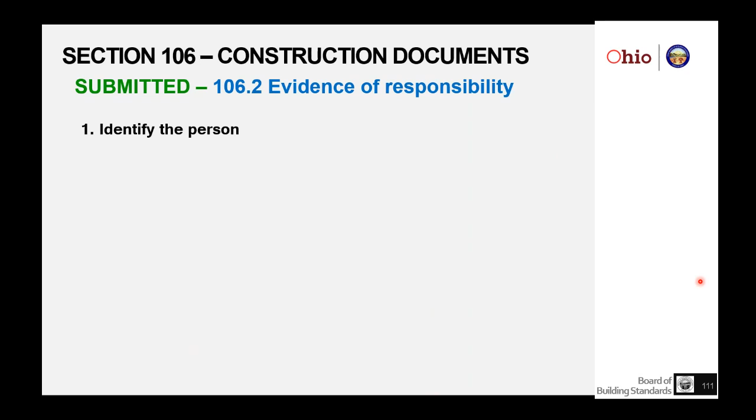106.2 requires that the construction documents identify the person that is primarily responsible for their preparation. If a registered design professional has prepared the documents, the seal that they put on is a requirement of their registration laws, and we just require evidence of that responsibility. You can use the fact that the seal is there as having evidence of that responsibility.

If technical analysis is required as part of the work, which happens with a lot of non-residential buildings or buildings regulated out of the OBC, that's kind of where that seal comes in - the technical requirement or the technical analysis requires registered design professional involvement, and the seal is used for acknowledgement of that.

We specifically identify where a seal is not required. It's not required in 1, 2, and 3 family dwellings, energy calculations, fire protection systems that are designed by a fire protection systems designer - they have a similar authority for the fire protection systems as they are a registered design professional for a fire protection system - replacement systems, equipment, and devices, and alterations not affecting health or safety in these areas of the building: means of egress, structural, mechanical, electrical, plumbing, or fire protection.

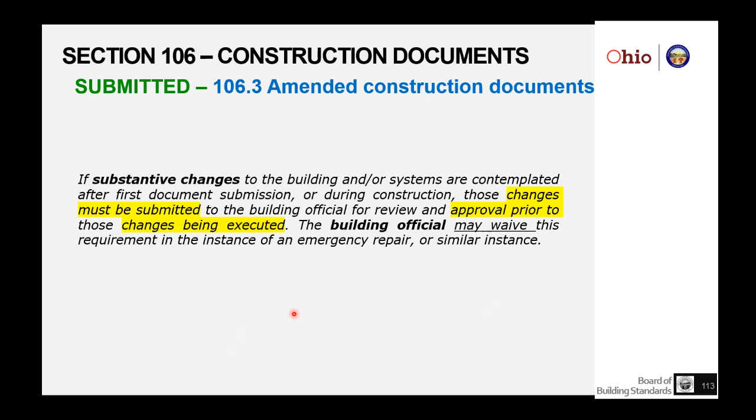If changes are made after approval is given, there are times when the owner has to amend the construction documents, and these are going to be for substantive changes. They need to be submitted to the building official for review and approval prior to any of those changes being executed. Substantive changes are going to be determined by the building official, and they are typically going to be those things that require a different application or trigger additional requirements from the Ohio Building Code, as applicable.

So 106.4, alternative materials, methods of construction. Remember, we want the building code to be helpful to the owners, so we don't want to limit them to a palette of things. If they have a material or a method of construction that is new, innovative, or different, or hasn't been done before, one way to help them get it approved is 106.4 for alternative materials and methods of construction, and basically it directs you to go to section 114, and Rob will be talking about that in part 2.

You'll see specifically for prescribed equipment is 114.3.1, and for not prescribed materials and equipment is 114.3.2. Alternative engineered design is the other way to deal with new, innovative, something different. That's 106.5, and as long as they comply with 106.5.1 to 106.5.3, they could do an alternative compliance.

You need to look for a statement of conformity to the intent of the code, and you need to look that the work proposed is going to be equal or greater and in accordance with the manufacturer's instructions.

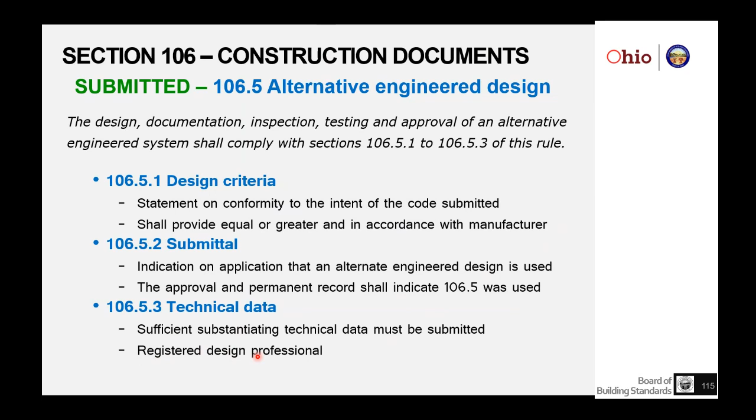Again, we start with the revised code 3791.04, requires that approval before construction can begin. Documents must be prepared that show conformance, submitted to the building department, and must be approved. And who does the approval? Building officials do the approval. They have help from plans examiners, but you'll learn more about that in breakouts.

So in that application process, the owner initiates the submission. They have the responsibility, if they want to build something, that they need to make application for plan approval to the building department. They are responsible to provide the information that describes the work proposed. It locates the proposed project, it identifies the uses and occupancies. They need to include construction documents and other information. They must sign their application and declare whether IUs, listed or labeled products or alternative engineered design is used.

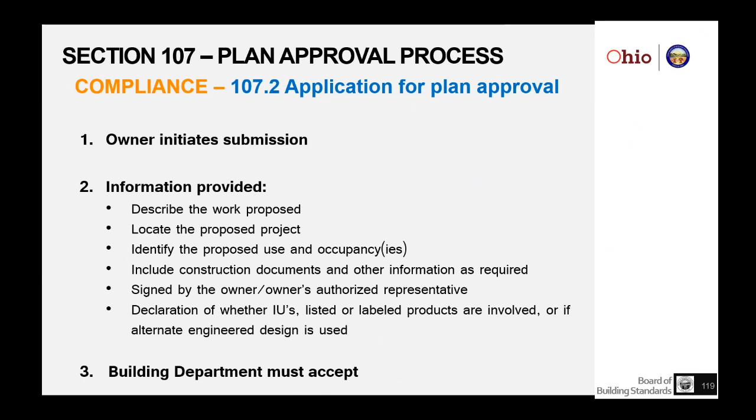And finally, the building department must accept a submitted application for plan approval from the owner. They may not have adequate information on all of these things, but if they come to that counter and want to make an application for a plan approval for work that they want, the building department must accept that work, and the 30-day clock begins.

So there are time limitations on the application. I mentioned them once already. They come out of the revised code and they are echoed in 107.2.1 of the rules. Basically, the approval is a license to build what is approved. The building department has 30 days to issue that approval, and in the failure to approve it within 30 days, it is considered a denial, and a denial results in an adjudication order that the owner may appeal.

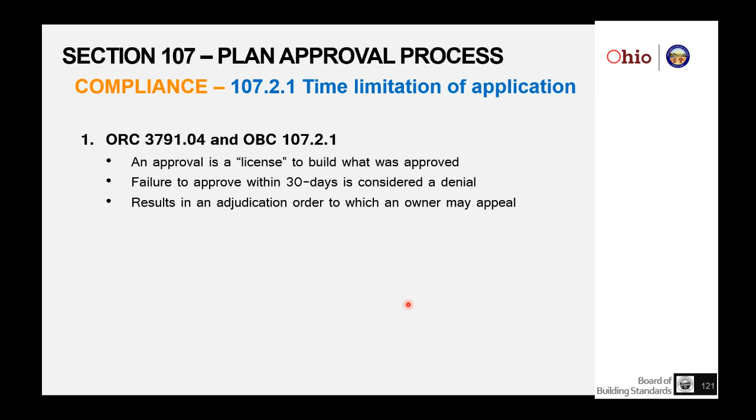Invalid applications.

Remember, we talked about how you have to accept the application. You can review the completed application, and you potentially could issue an adjudication order because of not enough information. After 6 months, automatically, if the owner hasn't responded to the adjudication order, that application is considered invalid. So there is a time frame to invalidate the application for plan approval.

It requires accepting the application, issuing an order, and 6 months passing without response from the owner.

So the review of the plans by the building official can be done by the building official, a master plans examiner, or an elective plans examiner. Obviously, the building official has to cause it to be examined. They may also carry the certification and can do the plans examination themselves.

So at 107.5, plans are reviewed. They are found to be in compliance. The plans examiner makes a recommendation to the building official, communicating his findings and recommending a condition and the type of approval that could be issued.

The building official reviews that recommendation and basically evaluates what he's found from the plans examiner and possibly the fire official. He makes the final determination of conformance, and if he determines conformance, he stamps and endorses the construction documents as approved, which, remember, is a license to build what is on those construction documents.

Along with that, he issues a certificate of plan approval with the list of required inspections, because it's going to be the owner's responsibility, when the project gets to the point of needing a required inspection, to notify the building department. But the building department provides that list.

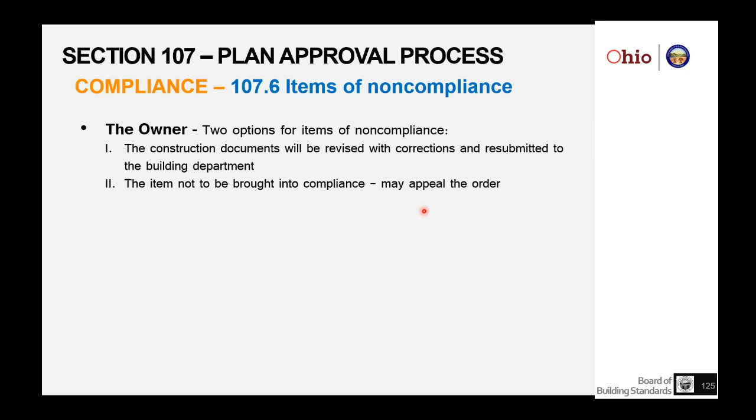One is he can revise the documents with the corrections and resubmit to the building department, or they can choose to not bring it into compliance, in which case the building official will issue an order and the building owner may appeal that order. Then it's up to the appeals board and the decisions made there as to what needs to be done.

So the building official, as a result of non-compliance, needs to add notes to the plan review recording the information about this issue of non-compliance, including the option chosen by the owner.

Remember, we are responding to what the owner wants to do. Include the code citation and the items of non-compliance and any actions needed to correct those items. This is all information that goes in an adjudication order. He does need to determine if it requires an order, and usually if they decide not to bring it into compliance, it will generate an order and the owner can appeal.

So once the approval is given, there are at least two construction document sets submitted with the application. One set is kept by the building official. The other set or sets are returned to the applicant.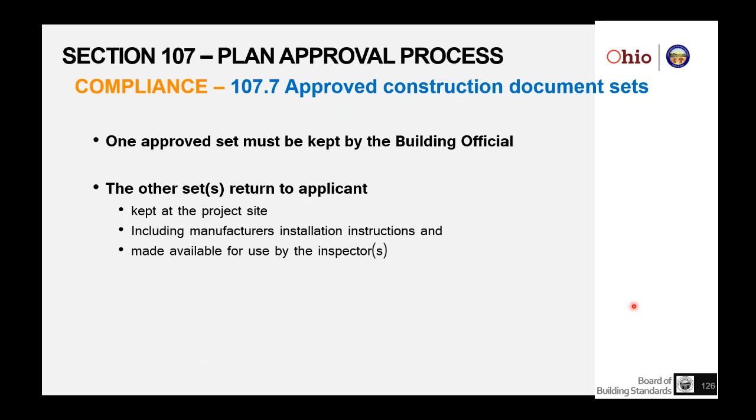Of those sets, one set must be kept at the project site, including any manufacturer's instructions, and all that information is made available for use by the building inspectors, because the building inspector's job is to review in accordance with the approved documents.

So compliance. What are the concepts about inspections? Now, I know Rob is going to go into much greater detail, and I should have mentioned on plans examination, Debbie Oler is going to go into much greater detail about that plans examination process in the plans examiner breakout. Rob will go into greater detail on the inspections process in the inspectors breakout, and then also dealing with Chapter 1, Part 2 for orders and appeals.

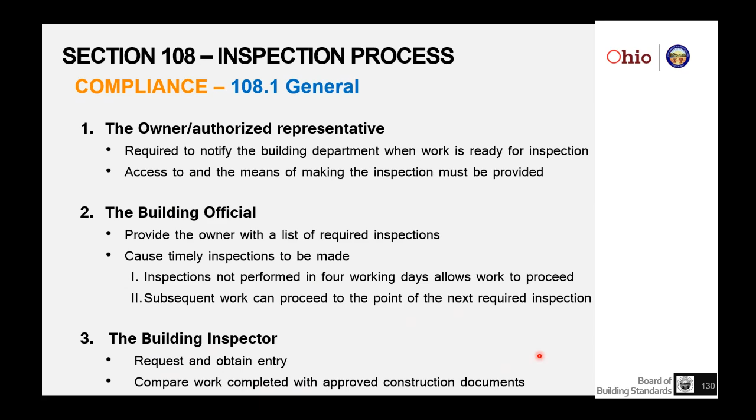And their role is to compare the work completed with the approved construction documents, not with the code, not with what they think ought to happen. It is what is on those approved construction documents, and does that work that was completed, the actual work in place, does it match the approved construction document? That's the process in general. So required inspections, as listed in the code, it is a basic list, but it's not an all-inclusive list.

This is the list without bullets, but these are the lists of required inspections. One of the things you will note is that there is a tab for other, and it allows the building official through the plan review to identify other times when they feel an inspection is reasonable and should be conducted, and they can include that in the list. All of these that are applicable should be listed on the list of required inspections that go to the owner as part of their certificate of plan approval.

A good example of one that might not be required: let's say you're doing an alteration inside an existing building, you're not increasing the footprint, you may not require lot line markers to be verified and inspected as part of an alteration that is totally internal to a building. Same kind of thing with footing and foundation. If no footings and foundations are going in, there's nothing to inspect, so you wouldn't necessarily require that inspection. So know that you can modify these required inspections when the proposed work does not involve requirements about these categories.

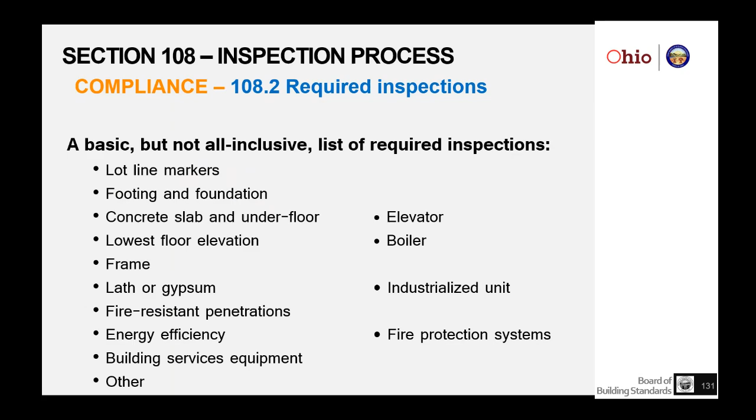Right of entry is actually addressed in 108.4. The building official or his designee, the building inspector, is authorized to enter the structure to inspect and perform their duties, provided that the building inspector shows credentials to the occupant, and that entry is requested and obtained. So you are authorized to go into the building, provided you have credentials that identify you as a building inspector, the building official's designee, or the building official yourself, and entry is requested and obtained.

It goes further to talk about where permission has not been obtained or is denied, or the building official has probable cause to believe there is a serious hazard in the building. The building official shall proceed. Section 109 is about orders, and whatever other recourses the building official has to secure entry into the building. This usually is talking about an administrative order to gain entry, which is a legal process by which an entity other than the owner grants permission to the building official to enter that building legally.

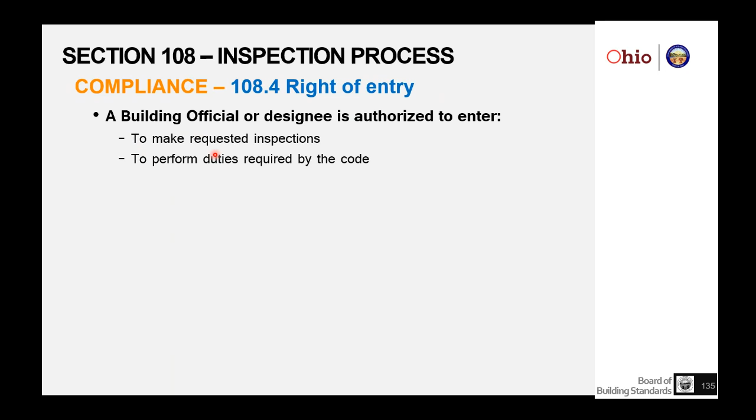So there are the two cases about getting right of entry. It's an important thing, it's a legal thing. So summarizing it again in bullet points: you are being authorized to perform your duties. Your duties are to make a requested inspection. You may have some other duties required by the code, but primarily at this point it's going to be required to make the requested inspections.

Before you can enter, you need to present at a reasonable time, present your credentials, and request and obtain permission. So if you get a request at 1 a.m. in the morning, unless it's specifically coordinated with the building owner, that is not the time to do it - you have to be at a reasonable time. Oftentimes that's office hours or when the job site is open. You have to have your credentials, and present them to identify you as an official, and you still need to request and obtain permission.

And then, of course, reasons for getting an administrative order are that entry is not obtained as a result of denial, or some probable cause that a serious hazard exists.

So there is a range of results that can happen with inspections. Obviously the first one, they can comply with the approved construction documents. That's the easy one, you get a satisfactory check, and the owner continues to the next required inspection. The inspector goes out, another satisfactory check. If the work does not comply with the approved construction documents, it's an unsatisfactory check, and the building inspector has some responsibilities at that point. We'll go into those in a little bit.

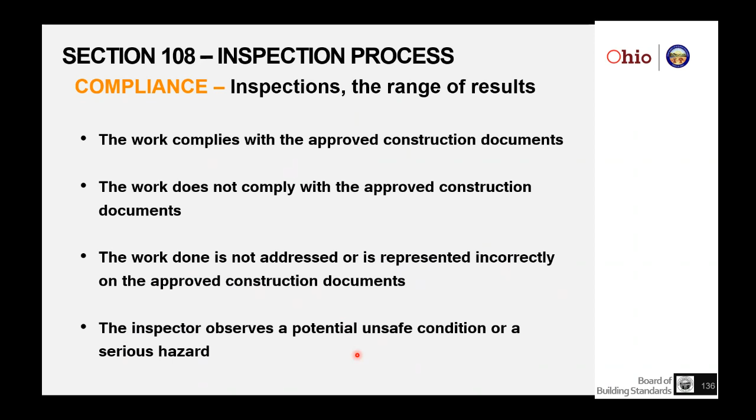It is incumbent on the building inspector not to simply say it's not code compliant, but he does have responsibilities to report back to the building owner. We'll talk about that more. So the inspector, if they observe a potentially unsafe condition or serious hazard, always has a responsibility to notify the building official in such cases. Usually we recommend that be done through verbal communication, because since it's unsafe or a serious hazard, people should probably be removed from the area, and the building official could direct the inspector to make that direction.

So inspections and compliance, that's the easy one. If the work is in compliance, you communicate it to the owner, make a note in the inspection record, and communicate that to the building official. Once all the inspections are complete and satisfactory, the building official shall issue a certificate of occupancy. So communicate, do the inspection, communicate to the on-site representative, make note in the on-site record - you probably want to make note in your own log too. Communicate the findings to the building official, and once all required inspections are completed satisfactorily, the building official issues an approval.

Inspections where you have a violation, an unsafe condition, or a serious hazard are all covered in 108.6. If the building is constructed contrary to the approved documents, the building inspector directs you where you need to go, either comply with 108.6.1 or 108.7, which is the building official looking at it for issuing an order. You note that it's an unsatisfactory inspection.

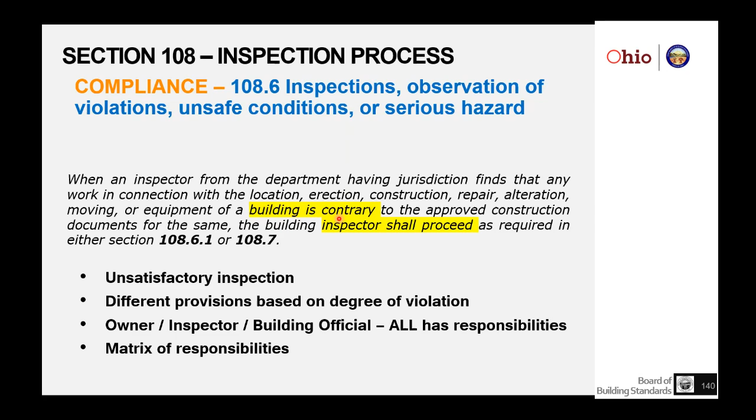Once we get into 108.6.1, where the inspection shows a contrary condition, the board has prepared an owner compliance options matrix. This can be found in the building department resource packet, and there is an option A, an option B, and an option C at the inspection process, and it talks about all the steps to take based on how the owner wants to address the non-compliance.

Basically what happens under 108.6.1, where something is contrary to the approved documents, you need to communicate the three options available to the owner. Option A is they can bring the item into compliance and ask for a re-inspection. They can revise the construction documents as option B and resubmit to the building department for approval, or they can request a determination or adjudication order from the building official.

So this is, we don't want to change anything, we want to build it as we have, we want to leave it alone. The building official needs to determine whether it's compliant or not compliant, and/or issue an adjudication order, to which the owner may appeal.

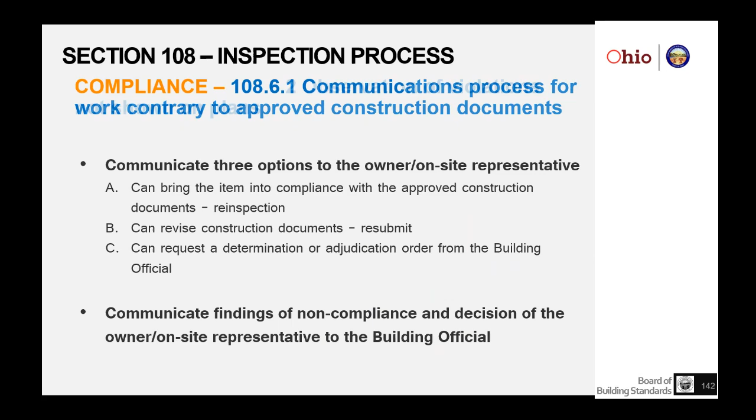You also need to communicate the findings of non-compliance and the decision from the owner - option A, option B, option C - to the building official. That's your job as an inspector on the inspection process.

108.6.2, this is the observation of violations not shown on the plans. This is where building inspectors need to know the code, but they don't inspect to the code - they inspect to the approved construction documents. But if they do happen to notice what they believe is a code violation that's either shown incorrectly or not adequately, the inspector has to communicate that to the building official so the building official can make a determination.

In that determination, the building official has a couple of choices: one, either let the work stand, or if it is significant enough, he may want to communicate to the owner a notice of recommended change. Remember, an approval has been issued - the owner has a license to build what's on the approved documents. If something is a code violation, it can fall into a notice of recommended change to the owner if they chose option C, unless in fact it's a serious hazard, in which case that needs to be corrected.

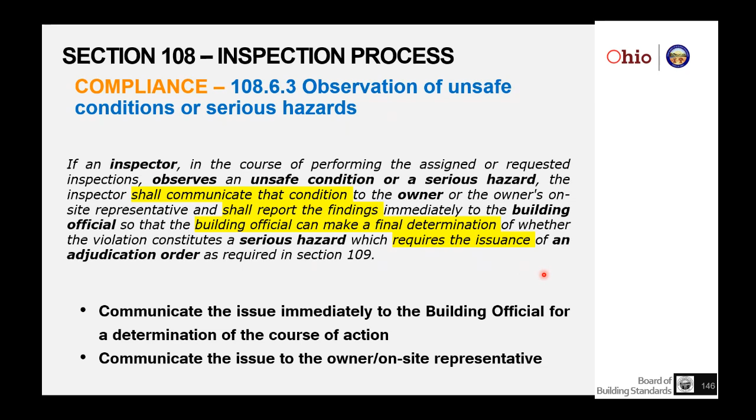So 108.7, this is about communications when work is contrary to the building official's determination of non-compliance. This is what the building official is required to do as part of the inspection process. They need to evaluate what the inspector is telling them, render a final determination, and determine whether an adjudication order is necessary. The building official will make that determination within 4 days of the inspector's reports.

So you have a time frame, and there's the potential of requiring an adjudication order to be issued, or a notice of recommended change, or it's not of such significance that anything needs to be done. The owner continues to proceed with his construction.

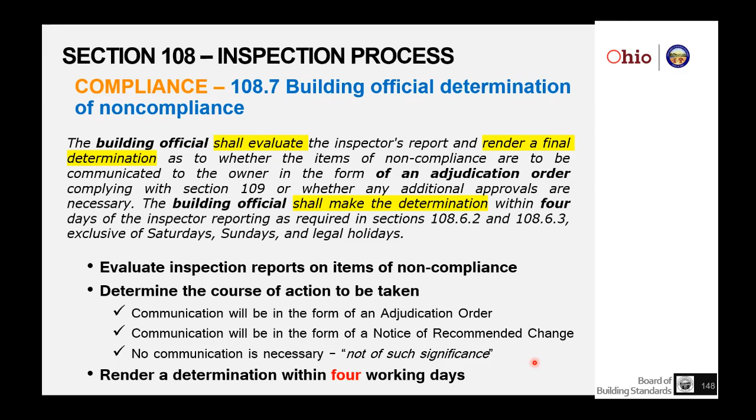The last section I'm going to cover is certificate of occupancy and completion. Remember, this is the last step on the building approval process. This grants the owner the right to occupy and use their building. It starts off that no building shall be used until the building official issues an approval. That approval comes in the form of a certificate of completion or certificate of occupancy.

The certificate of occupancy deals with any space that has a change of occupancy, it's new space, it's a new building, where the risks have increased and you need a certificate of occupancy to occupy the building.

On that certificate, it will have that it's in compliance and has any stated conditions of how the building can be used. This is information really for the permanent record, to help down the road with what has been approved in the past. As you start working on these and filling these out, you'll know that approvals come with some stipulations, and sometimes those stipulations need to be reflected in the certificate of occupancy.

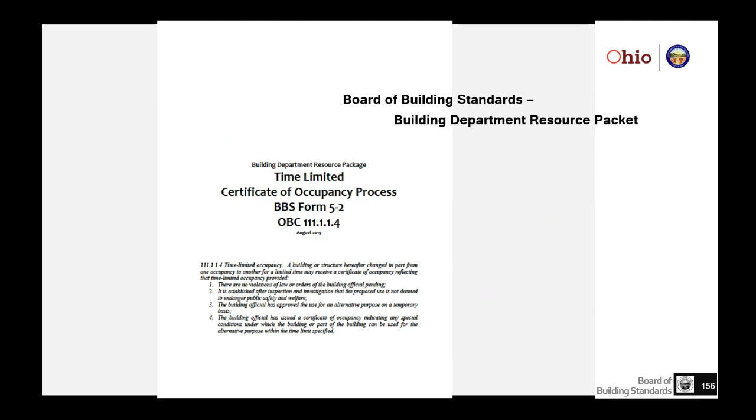The other is a certificate of completion. That's at 111.1.2. This is specifically for alterations and repairs. You'll use a certificate of completion.

These are the kinds of things where the building owner or occupants may want to continue to use the building while the work is going on. The work that's going on doesn't really affect the occupancy of the building, other than the inconvenience that the work is happening. And it made no sense to have a certificate of occupancy required, so we've added a certificate of completion for these particular projects.

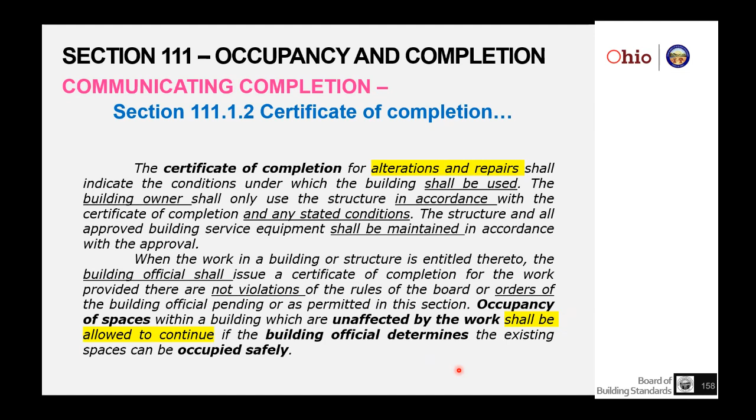So, the issuance of the certificate - basically there's certain information that must be provided on the certificate. It states the purpose for which the building or structure may be used. It may have multiple different uses. And there are 12 specific things that must be contained in the certificate of occupancy.